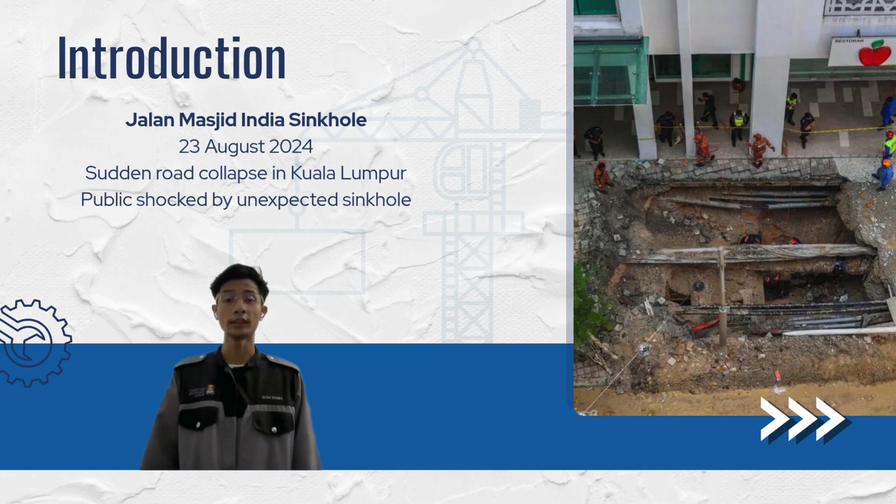Imagine while walking a busy city, suddenly the ground beneath you collapsed. And this is exactly what happened on 23rd of August 2024, where a sinkhole suddenly formed and shocked the public at Jalan Masjid India, Kuala Lumpur. Therefore, this case study focuses on the sinkhole incident that happened at Jalan Masjid India, Kuala Lumpur.

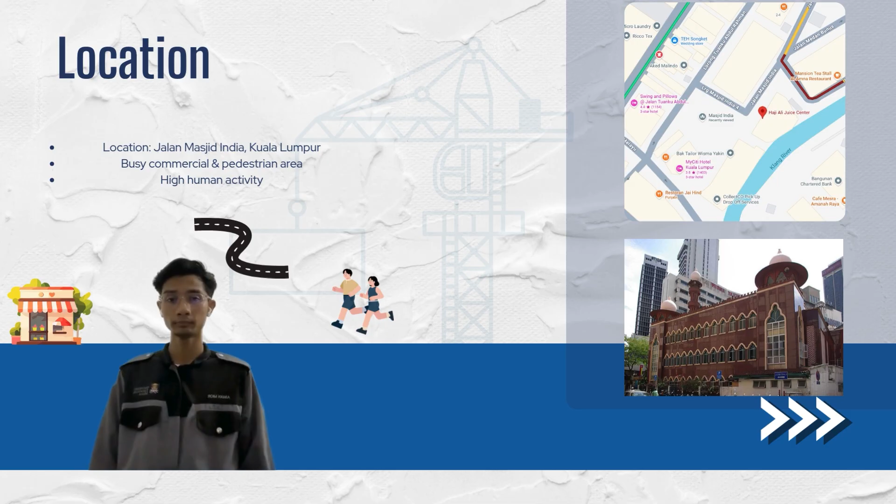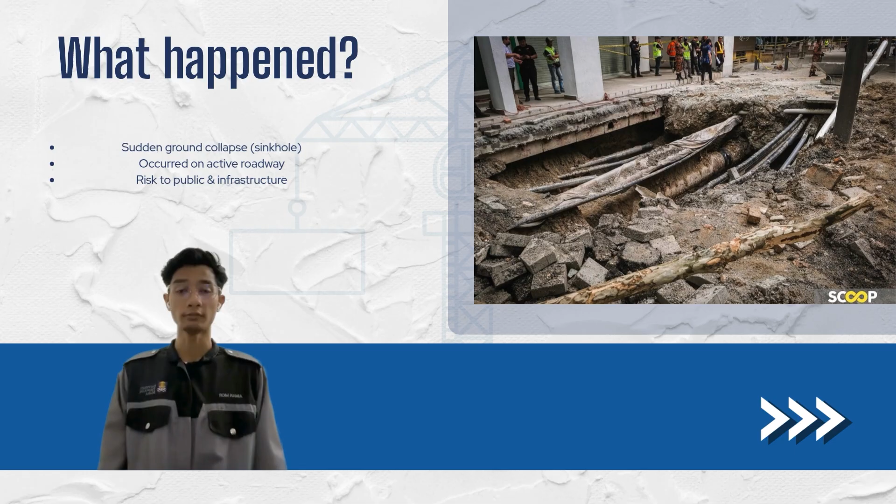Jalan Masjid India is a densely populated urban area surrounded by shops, roads and daily public activity. Because of its busy environment, any ground failure in the area can pose a serious risk to public safety and infrastructure. So, what exactly happened? This incident involved a sudden ground collapse, also known as a sinkhole or subsidence event. According to the investigation report, the main cause was the failure of a corroded sewer pipe combined with unstable soil conditions and heavy rainfall.

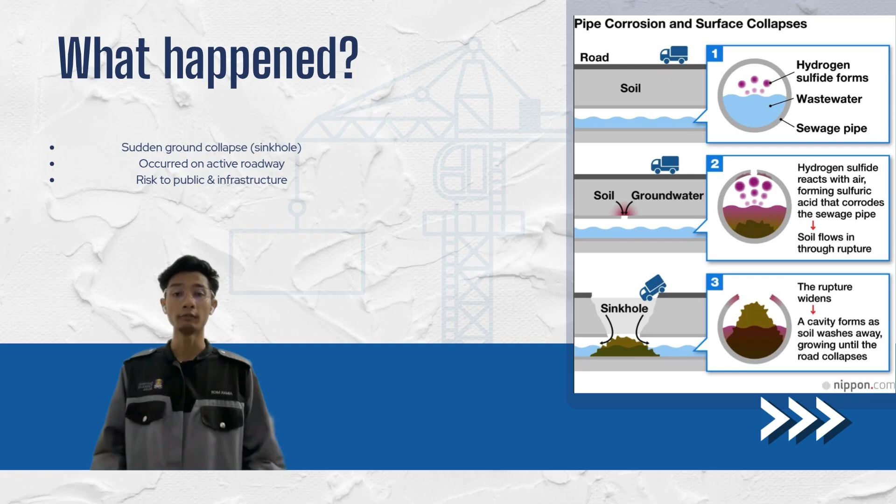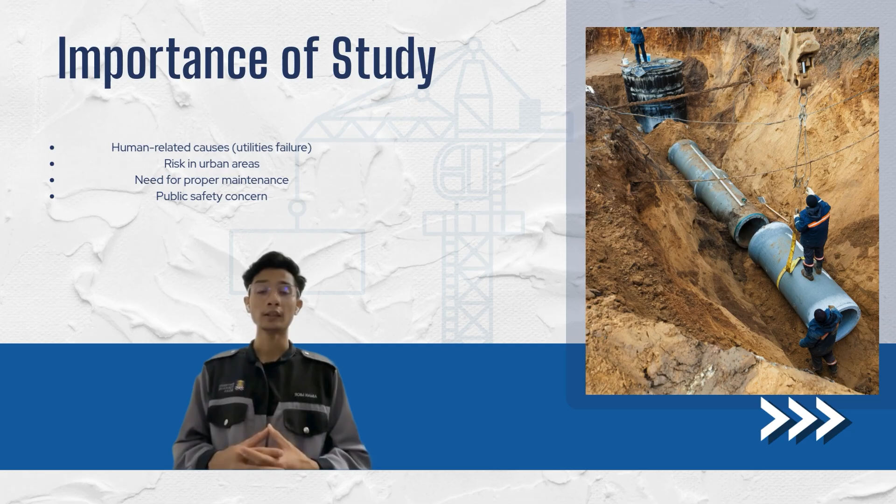Initially, many people thought that the main cause of this incident was limestone, but the study confirmed that limestone is located much deeper underground and was not the direct cause. This case study is important because it highlights how human activity, such as installation of underground facilities and infrastructure, can trigger ground subsidence in urban areas. It also shows the importance of maintenance, monitoring and engineering design in preventing such failures from happening again in the future. In the next sections, we will further explain what exactly happened beneath the ground.

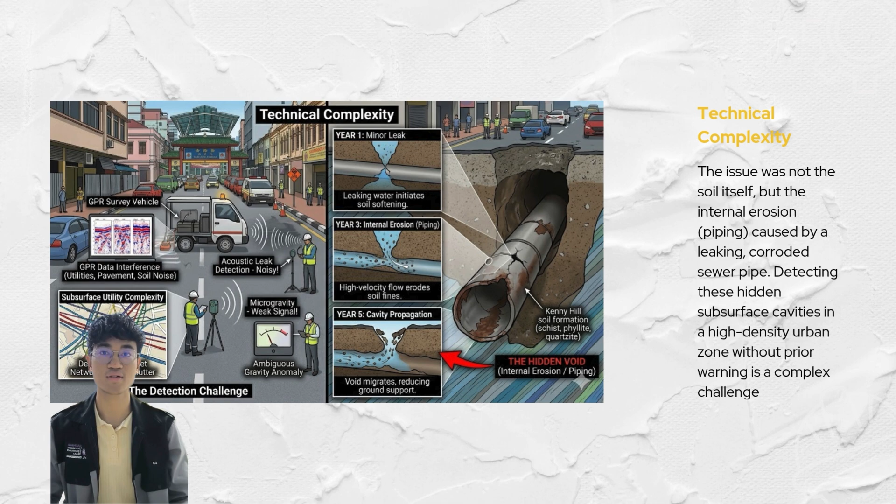To understand the Jalan Masjid India incident, we must look beyond the surface and identify it as a complex engineering problem involving anthropogenic ground subsidence. Number 1. The nature of the problem. Ground subsidence is typically a slow regional process. However, this incident was an infrequently encountered sudden cover collapse. What makes this case particularly unfamiliar to local practice is the geological context. While Kuala Lumpur is known for its limestone or karst topography, the Masjid India area actually sits on the Kenny Hill Formation consisting of schist, phyllite and quartzite. Under normal conditions, this is considered stable ground. The problem here was anthropogenic, meaning it was human-induced rather than purely natural.

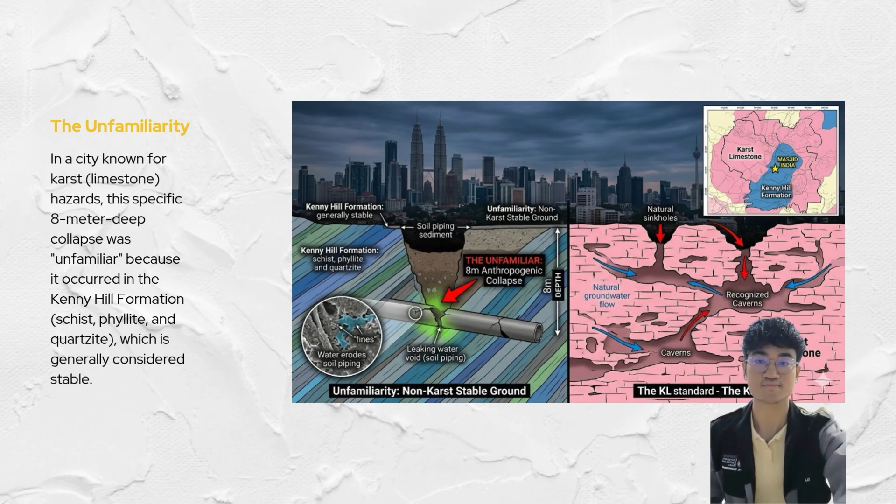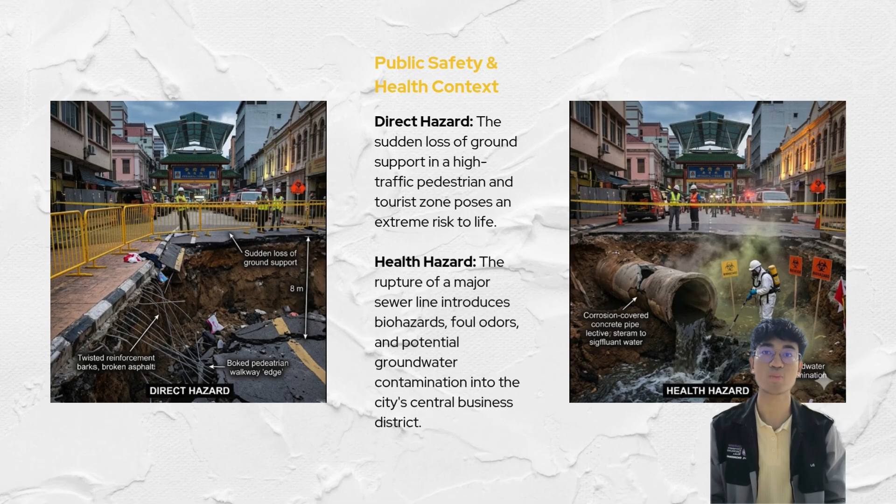Number 2. Multidimensional reasoning. To critically analyze this issue, we must evaluate it through 3 key contexts as required by the framework. First, the safety and health context. The suddenness of the deep collapse in a high-density commercial zone poses an immediate and tragic threat to life. Second, the legal and regulatory context. This incident exposed the complexity of regulatory compliance. Under the Street, Drainage and Building Act 1974, there is a significant legal challenge in defining the maintenance liability between the local authority DBKL and the utility asset owner IWK.

Finally, the societal and economic context. The collapse led to loss of public confidence in urban infrastructure safety. Economically, the road closure and subsequent search operation forced local businesses to halt activities, impacting the livelihoods of the community for months.

As we saw earlier, the sinkhole at Jalan Masjid India was not just a random accident. So, what actually caused the ground to collapse? First, Kuala Lumpur is built on limestone ground. Over time, groundwater slowly dissolves the limestone and creates empty spaces underground. From the surface, the road may look normal, but underneath, there can already be hidden cavities. Second, leaking water or sewer pipes can wash away soil underground. This process weakens the ground support and creates small underground tunnels. When the soil becomes too weak, the surface can suddenly collapse.

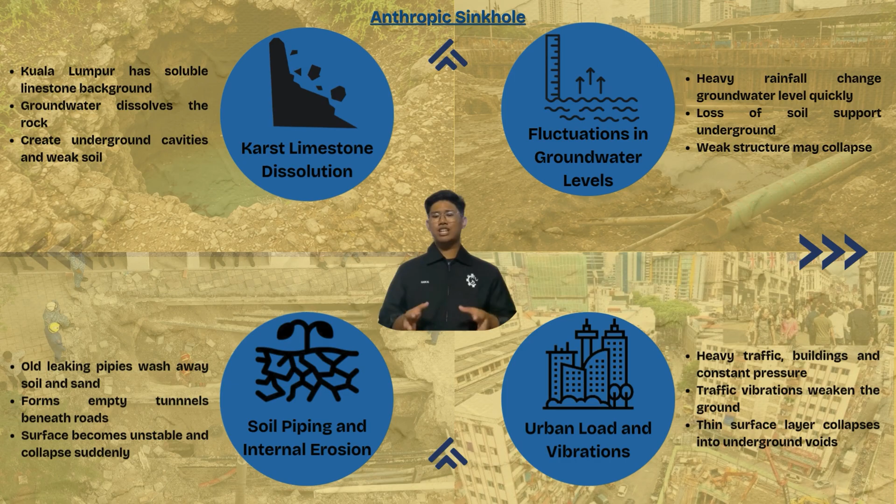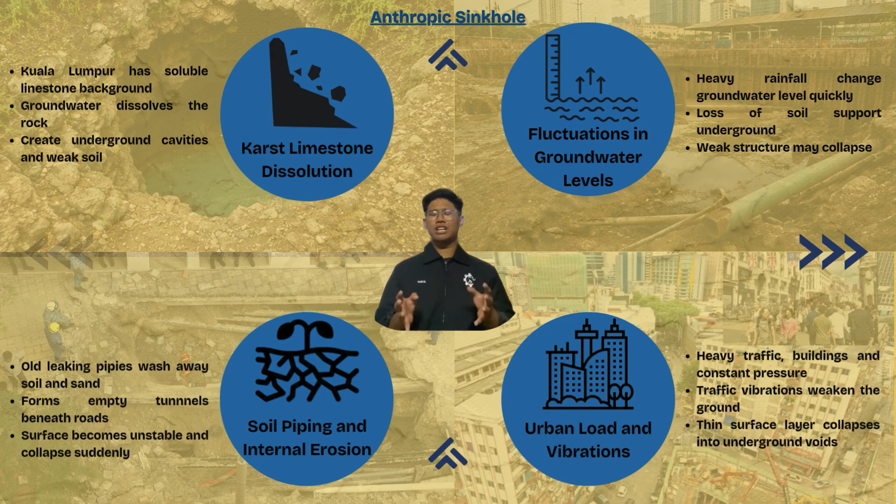Third, heavy rainfall also affects the ground condition. When groundwater levels go up and down quickly, the soil becomes less stable, especially in areas that are already weak. Lastly, the busy urban environment adds more pressure. Heavy traffic, buildings, and constant vibration put stress on the weakened ground and can trigger the collapse. In conclusion, the Masjid India sinkhole happened because of both natural ground conditions and human-related factors.

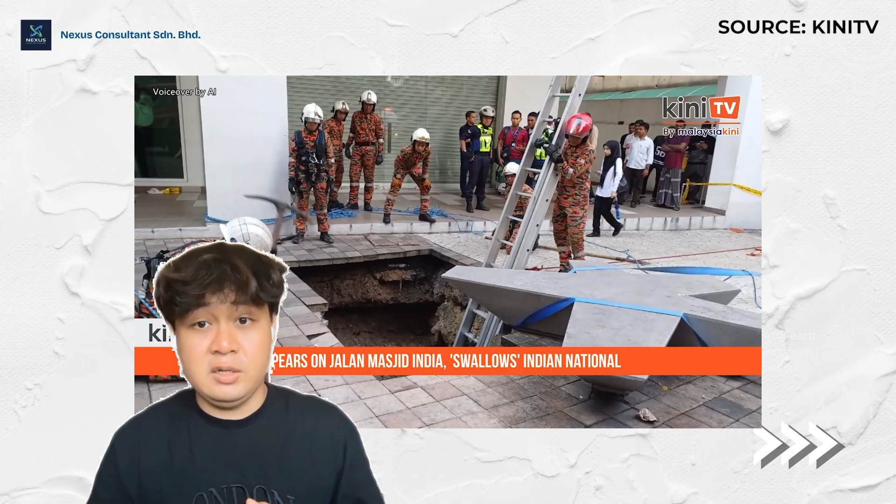23 August 2024, a tragic deep sinkhole at Jalan Masjid India became a wake-up call for urban Malaysia. But engineering safety is not just about soil, it's about compliance, stakeholders, and regulations. To prevent such disasters, we must internalize the regulations and the stakeholder roles that form our safety nets. Our first line of defense is the Street, Drainage and Building Act 1974. Section 4 mandates the local authorities to maintain the public street, while Section 70A governs earthwork.

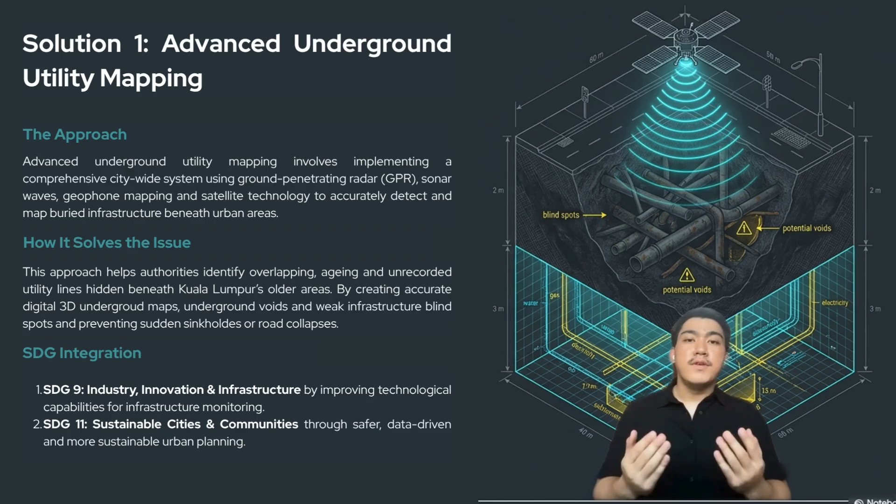Through accurate mapping, authorities can identify underground voids and aging pipelines before failures occur, helping to prevent sudden sinkholes and road collapses. The solution supports SDG 9 and SDG 11 by improving infrastructure monitoring and promoting safer, sustainable urban development.

The second solution is mandatory geotechnical audits and ground scanning before approving any development project. This involves soil investigations, borehole sampling, and geophysical scanning, with all results analyzed by accredited geotechnical engineers. Kuala Lumpur's limestone soil structure makes the ground vulnerable to instability and underground caverns.

By identifying these weak zones early, engineers can design suitable foundations that avoid unstable areas and improve structural safety. This solution mainly supports SDG 11 by reducing risks from structural disasters and ensuring safer urban development.

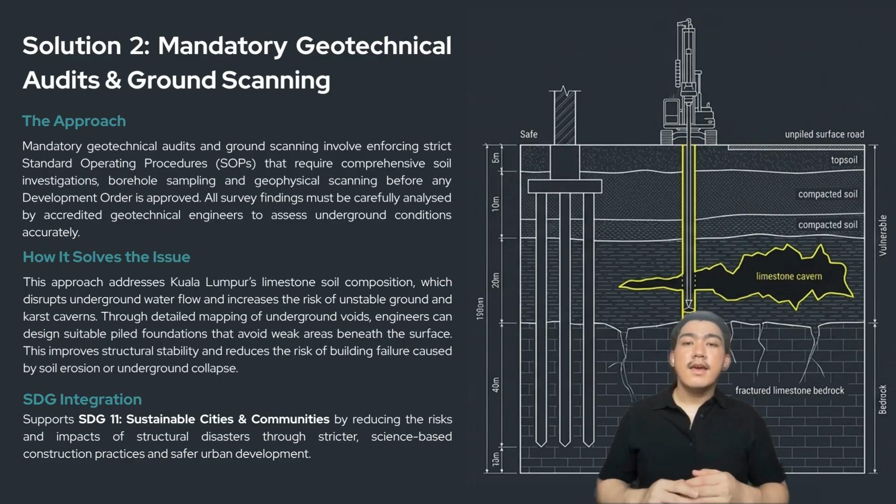The third solution is proactive infrastructure maintenance and upgrades. Instead of waiting for failures to happen, authorities should implement planned preventive maintenance by replacing aging water pipes and sewerage systems before they become damaged.

This is important because leaking underground pipes can wash away soil and create hidden voids beneath roads and buildings, eventually leading to sinkholes. By reducing leaks and maintaining secure pipelines, the solution helps strengthen infrastructure resilience, supports SDG 6 through better water management, and SDG 9 through sustainable infrastructure development.

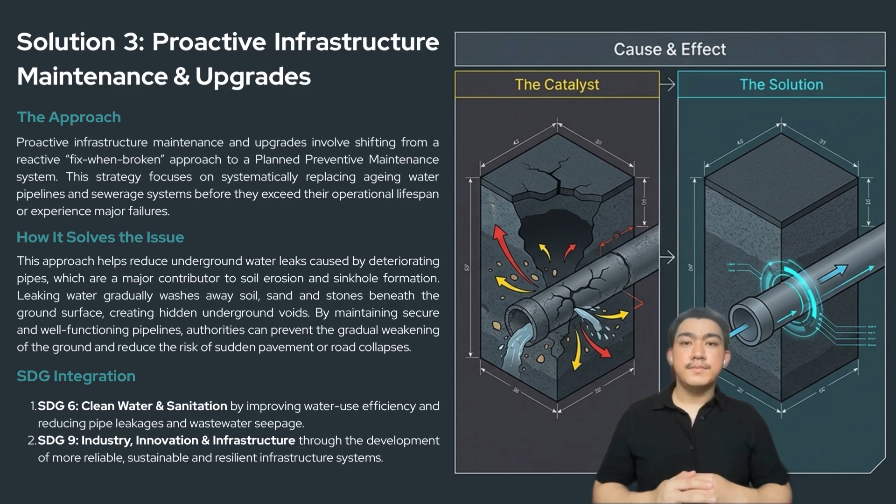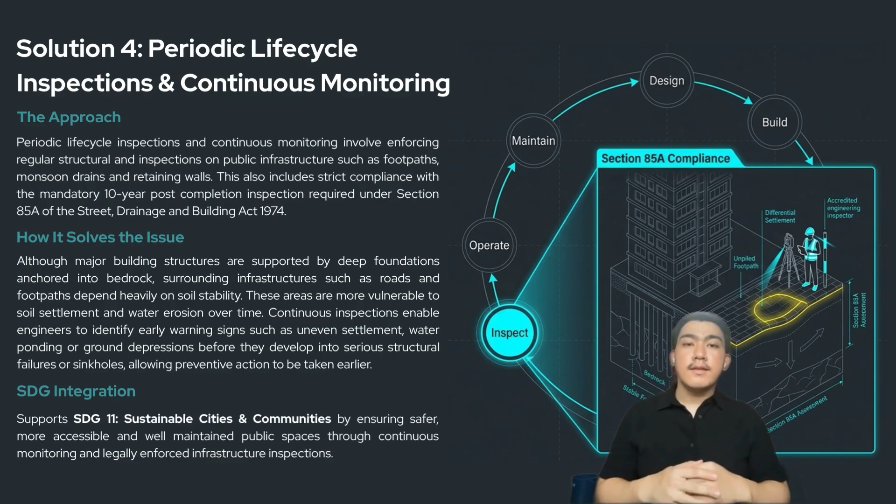Now it's my turn. Okay, my name is Amir.

As civil engineers, we have a professional responsibility to prioritize public safety and long-term resilience over temporary fixes. I will now critically evaluate the societal and environmental implications of the proposed solutions for the Masjid India sinkhole. The analysis is grounded in engineering judgment and technical literature, focusing on how this intervention reflects real-world professional practice in karstic terrain.

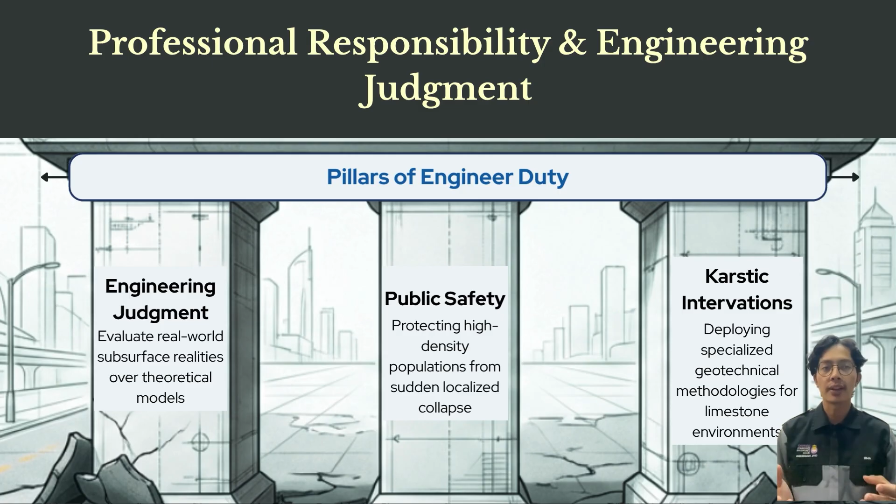From a societal context, a sinkhole is a local collapse that can destroy roads and utilities, posing an immediate threat to life in high-density urban areas. Our advanced underground utility mapping and mandatory geotechnical audits directly mitigate this by identifying hidden voids before they lead to sudden surface failure.

Beyond immediate public health and safety, these solutions restore public confidence and prevent socio-economic disruptions, such as business interruptions and loss of property values in major commercial hubs like Kuala Lumpur. By mapping the depth of limestone caverns, we ensure the structural integrity of the surrounding community.

Moving to environmental impacts, our focus is protecting urban infrastructure from the risk of limestone dissolution. Our proactive infrastructure maintenance replaces aging, leaking pipes that are the primary human-induced catalyst for soil erosion. This aligns with Sustainable Development Goal number 12, responsible consumption and production, as we prioritize resource efficiency and lifestyles in harmony with nature.

Furthermore, our approach supports Sustainable Development Goal number 11, sustainable cities, by ensuring water management systems and soil porosity are not permanently damaged by subsurface ruptures, thereby preventing environmental contamination.

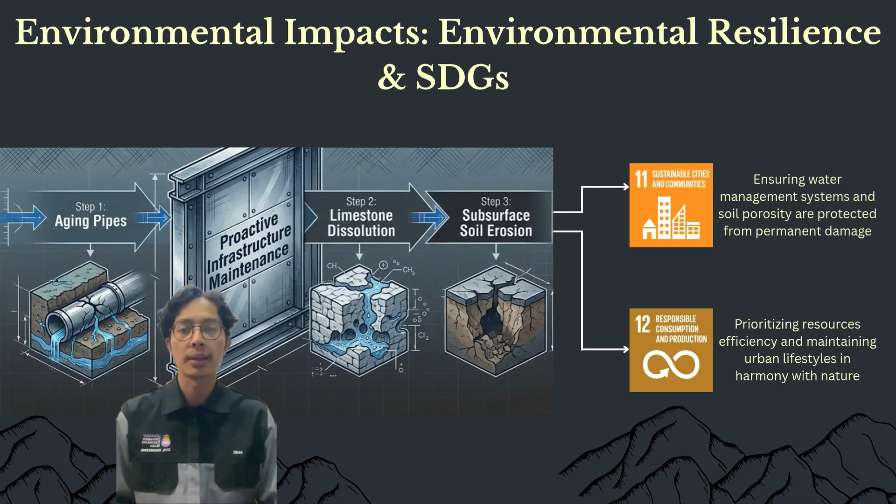Finally, we address regulatory compliance through periodic life cycle inspections and strict adherence to Section 85A of the Street, Drainage and Building Act 1974. While these proactive measures involve higher initial costs and complex interagency coordination compared to a fix-when-broken model, the long-term impact is a significant reduction in structural disasters. Our engineering judgment concludes that the trade-off of higher investment is necessary for the resilience of Kuala Lumpur's infrastructure.

That's all from me. Let's go to the next part.

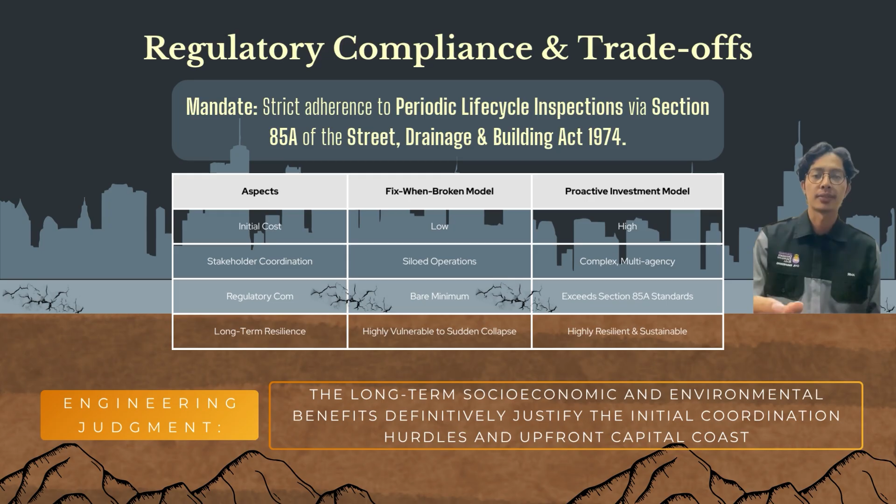The mitigation of sinkhole risk in Kuala Lumpur cannot rely on any single intervention. It demands a cohesive synergy between advanced technological mapping, rigorous geological science, diligent infrastructure upkeep, and strict regulatory enforcement. In conclusion, the 2024 sinkhole incident serves as a critical wake-up call for urban management in Kuala Lumpur.

The sources indicate that the city's safety depends on moving beyond crisis response toward a systematic integration of technology, mandatory soil analysis, and proactive infrastructure maintenance. By addressing the intersection of natural limestone geology and aging man-made utilities, the government can better protect the community and ensure long-term urban resilience.